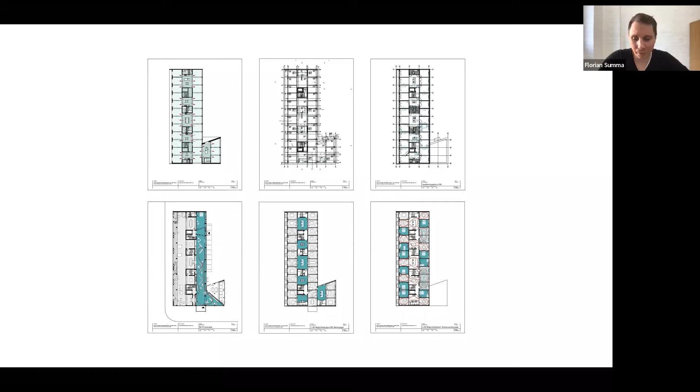Our question in the competition was: how universal, in a way, can the structure of a building be, while still allowing a lot of variety in different forms of living inside it?

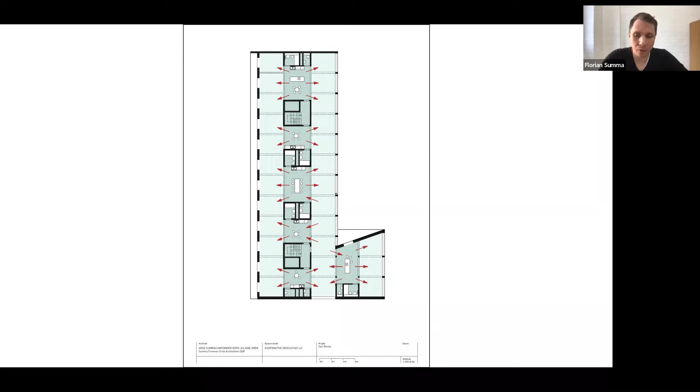This structure runs through the whole building, through all stories. Looking at this raw construction plan, you see it's a skeleton plan—only a few load-bearing walls, mostly connected to the staircases, with concrete columns on the outside, and then this grid of squares and fields which structure the building.

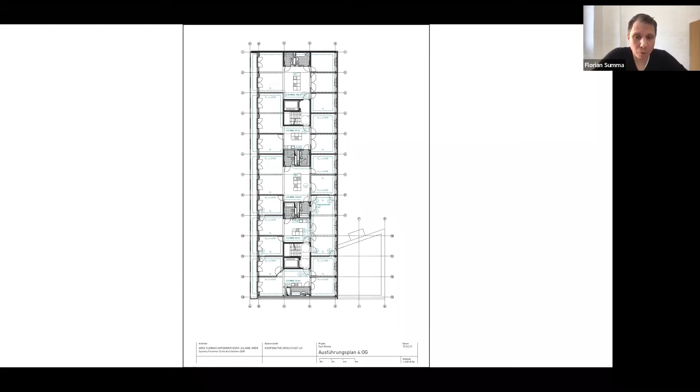The next step would be the fit-out plan for one of the stories, the fourth story here. What was added now is a wooden facade between the concrete columns, and quite a lot of lightweight partition walls which divide this field of rectangles into the different flats.

Of course, it's hard in this plan to see where the edges of a flat or apartment are, where it starts and where it ends. I'll try to illustrate it a bit later.

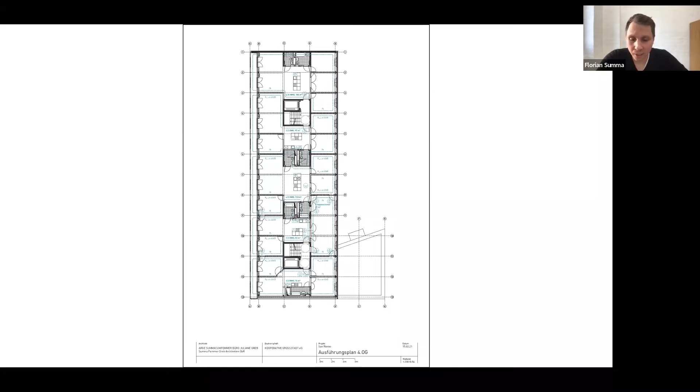As I said, we try to incorporate as many different forms of living into this structure, which was also in the brief. So for example, the cooperative asked for very big flats where a lot of people could live in, with a lot of individual rooms. Our concept was: isn't it possible to have just the kitchens in the middle as joint communal areas, and all the other rooms around it would be individual rooms for a shared flat system. We thought that's something which could be quite relevant in Munich, because it's quite expensive to live there.

Even though for the cooperative and our building there was a lot of focus on the costs, so in the end I think we achieved a very low budget building, but of course still it's quite expensive to live in Munich. And we said, okay, can't there be many individual rooms, because joint areas where you meet other people can be situated elsewhere in the building.

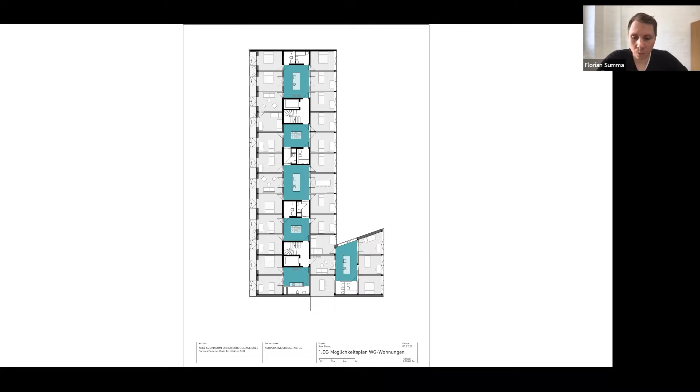And then we said there can also be, within the same system, ways of living where it's not so clear where your individual room or your individual area starts, but where things merge much more into each other, and one room which belongs today to one flat can belong to another flat the next day. I will come back to this later as well.

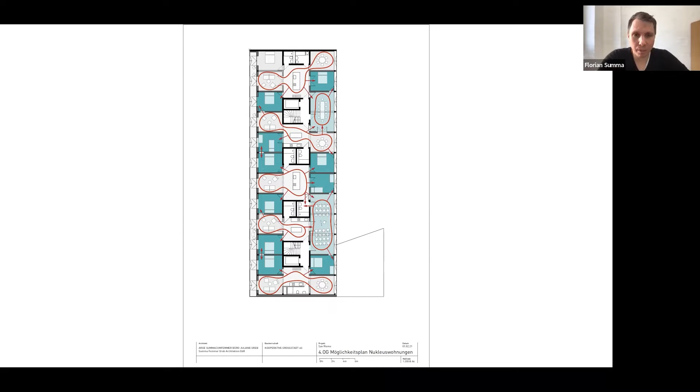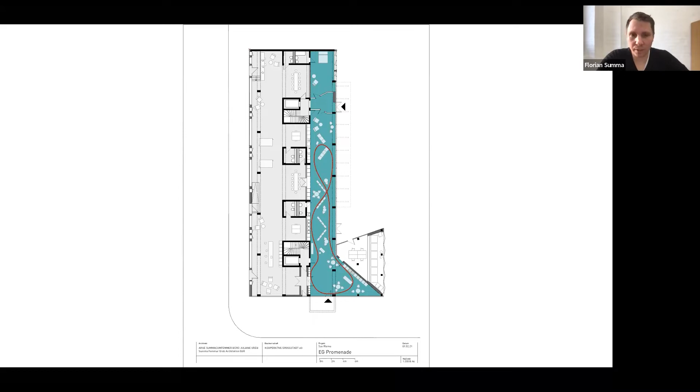So the next category would be 18 years, and we call it - could it be something like a period of childhood and adolescence in an apartment - which means maybe 18 years is something where you don't change the structure, or where you don't change any walls within the building, because 18 years isn't so long, and you can maybe deal with what is there.

But what you see is this structure, the concrete structure, which is something we think will never be changed, hopefully. And then the white walls, which of course can be changed, but maybe not every year, but maybe after 18 years or so, when the kids move out and you want to have a bigger room, and you can remove the walls because they are not load bearing, and the building doesn't collapse when you take them out.

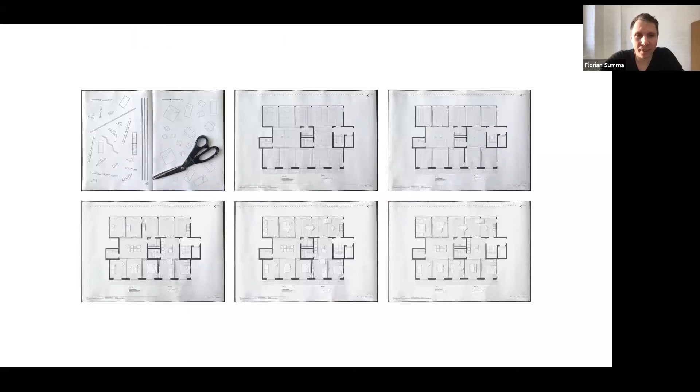We have this overall structure, which was pretty clear, and very precisely designed by us in terms of dimensions, proportions and sizes. Then there was a different phase within the construction process where we incorporated the future residents of the cooperative, and we sent them all a blank plan of their flats, with only the load-bearing walls and things they cannot change included.

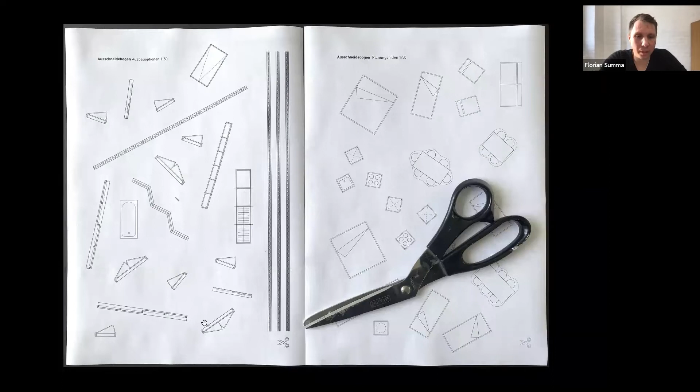Along with this, we sent them a cutout plan in the scale of 1 to 50 showing doors, lightweight non-load bearing walls, and furniture. And we asked the residents to actually design their own flat.

And the first thing, of course, here you see now 2 flats, which is indicated here. You see there's a minimum of individual rooms, like 3 rooms, and a maximum, and in this one here it's a minimum of 2 rooms. That's to do with the financial model, because they are subsidized, those rooms, and of course you cannot have too many, or there needs to be a certain number of people living on a certain square meter number.

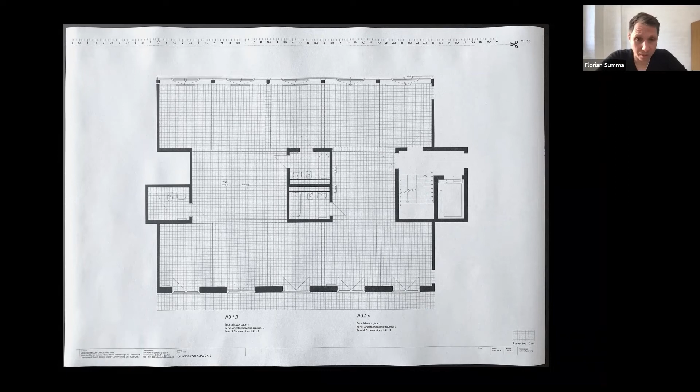So we gave them those plans, and what we got in return was, for example, this one, and here is now merged like 2 flats in one plan. They decided this flat here, for example, to have 2 rooms, like 2 of those 14 square meter rooms, divided by walls and added, and they added some doors. Then there's this kitchen here and a living area here which was left open, and then there's this extra room here which also has a door.

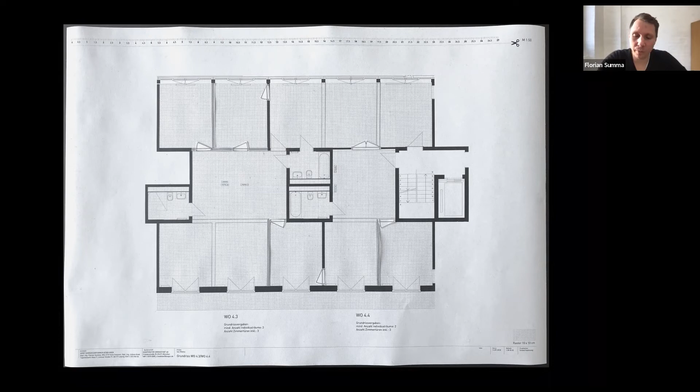And what is a bit special about this is that it also has a door from that side, which is actually the neighboring flat here. Also interesting, maybe, is this 3 squares here, which is the access to that flat. So if you enter here with the lift and the staircases, you don't enter directly into your flat, but you need to walk through that room here, which is a communal room, and which is also connected to that flat here and also this neighboring flat. And this family here decided that there should be also an additional door into this room from this communal room. Maybe in the next step you'll see why they did it.

So in those 2 rooms here, they have 2 kids. They placed 2 beds, and they had their master bedroom, or for the parents, they put a bedroom here, and the rest was the living room. The neighboring flat, it was just 1 person. She moved in here and put her bed into this room with a door, and had a kitchen here and a bit of a seating place. And that was the communal room.

I think in the beginning there weren't so many ideas of how to use that. But then, after a while, they realized those are actually architects, and they had to give up their very expensive office space in the center of Munich, and they moved their office into the flat and put it into this room. Now this door here makes sense because it's accessible to this communal room. So now clients and consultants, they walk through this communal room into their office here.

And the 2 kids had to sleep in 1 room in that period. Then there was another change, I think after 2 months or so, that actually the bedroom here from the parents moved also into the room for the children. So now there's this double bed, like 2 by 2 meters, and 2 small beds of the kids in here. So like 4 people actually sleeping in that room. And in return, this room no longer belongs to this flat.

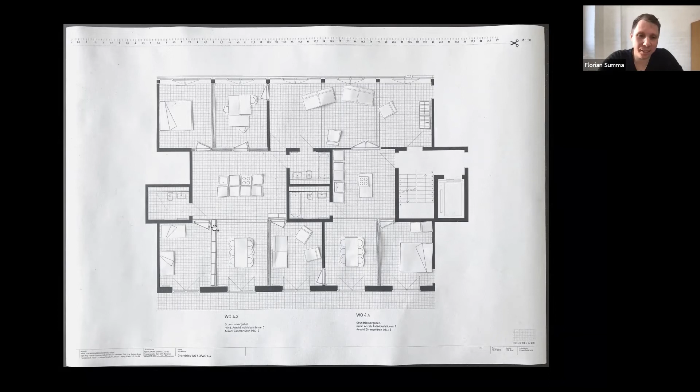They closed this door here, and this door was opened here. It's just a lock, of course, because this woman here got a boyfriend, and they need more space, so they took this room from this flat. Then, of course, they got a bit annoyed here after a while with the kids, and they divided this extra room here and put the kids here. I think this division is a bit more of a shelf right now, so it's not like a proper wall, but it works because it's the same size as every room.

So those would be changes which you could easily do within 3 years, as often as you want, because it's actually just closing a door and finding an agreement with your neighbor that you take the room from your neighbor, or you share it. And then, of course, some of them did some extra acoustic insulation. I think they put a mattress also in the door from the other side, because of course through a door you hear a bit from your neighbor, but you have a bit of flexibility in return.

Now turning to another project, and the time spans are getting shorter and shorter. 24 months was the time we spent on reconstructing the facade of our house in Leipzig. As you see in this image from 2014, it was really in a bad condition, and nobody wanted that house at the time.

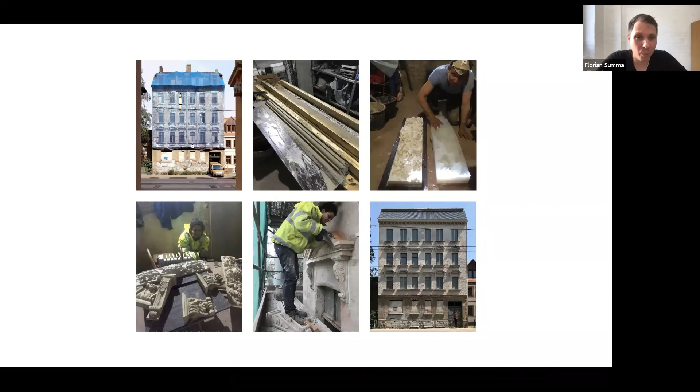The engineer and a lot of other people advised us to just tear it down and build something new. Of course that was not what we wanted to do, but we thought, a bit naively, can we not repair the house ourselves?

So we had a few things done by a professional, like fixing this roof on top. There was a cladding and scaffolding for 24 months, and we used this time to repair part of the facade ourselves.

With a lot of videos and YouTube research, we got into these themes. For example, we created profiles, or restored the existing stucco which was still okay, added the missing fragments and parts that weren't so good anymore, then made a mold of it with silicone and poured it with a special concrete.

So then we had all this stuff, and it was a bit of a weekend job, because at this time we were teaching and traveling by train, commuting every week from Zurich to Leipzig, 9 hours. We only had the weekends, but it was quite a lot of fun to produce this stuff.

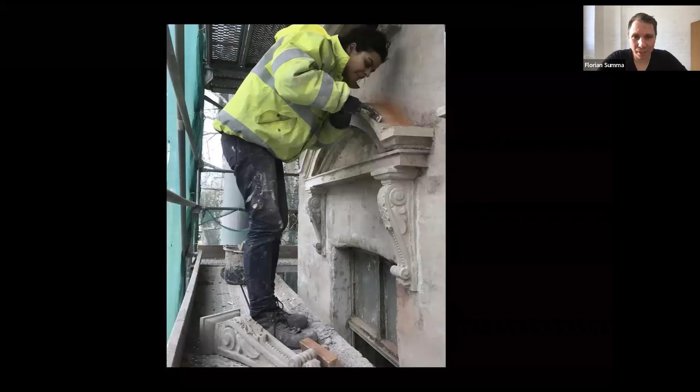And then, because we had the scaffolding, we could repair those parts, and it was interesting for us to really explore how the building was actually made.

It's quite interesting because we didn't know before that this part, for example, is sandstone. This one was plastered, and this one was precast plastered, while other parts were plastered on site, and in the end everything was painted so it actually looked the same. That was quite interesting, and that's the state it stayed in, I think, until 2 years ago.

At this time we still got letters from the city of Leipzig asking what we were going to do with the house, what the plans were, and if we ever wanted to move in, or if somebody wanted to move in.

Actually we were already living in the house for about 1.5 years, just behind those foils, which nobody sees, but we had an additional layer of thermally insulating windows behind them, which you'll see in the other images.

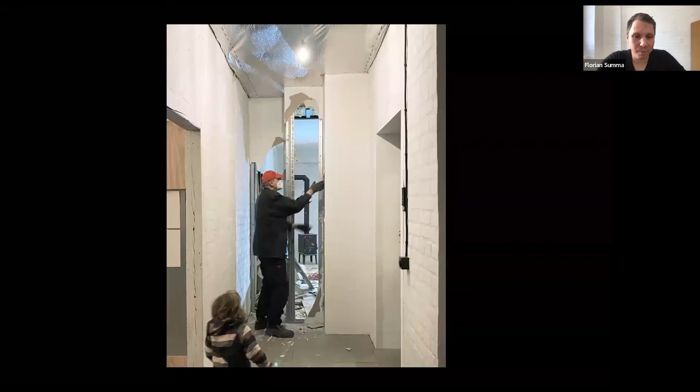This was a division we did because we only used 2 of the rooms, so we built this sort of wall, and after a few months we got rid of it again when we added the next room. During this time we had two kids, so we needed more space, renovated 2 additional rooms, and then could get rid of the wall again.

Even a shorter period, 4 months, maybe summer period until it gets cold. That relates to this entrance door, which we built ourselves. In the beginning we just needed some kind of door, and we wanted to have this opening, but we actually moved in without having it closed in any way. After a while we got our first kid and said, okay, we need to close it at least a bit, so we put this foil onto the door, and it was like this for quite a few months.

It was okay for us until we added this glass pane to the door, to make it a bit more proper. That's what I said in the beginning, I don't think it's representative in any way, or a kind of model for anyone else. It's just a very personal project of ours, related to our job as architects, and our joy to build things ourselves and experiment and try out things which you might not do for another client.

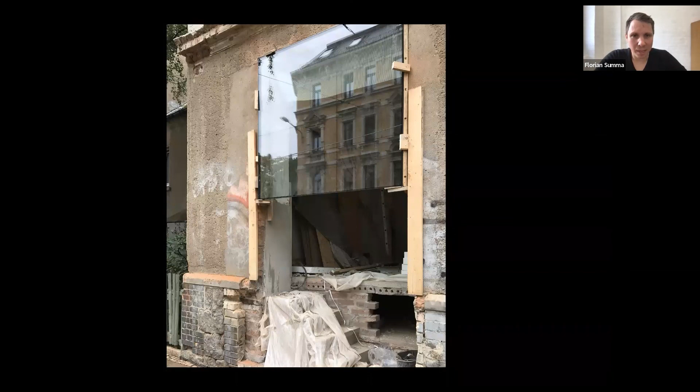Again, because we did everything ourselves, it took about 4 weeks, and then after a few more weeks we finally added this glass pane, which we again more or less not glued but screwed onto the existing brickwork, along with the door, which we organized quite quickly and included into it. The idea was how can we do things without needing a contractor to help us. So everything was available, the glass sheets you could just order, and it's just a matter of having enough people in the end to put it in there.

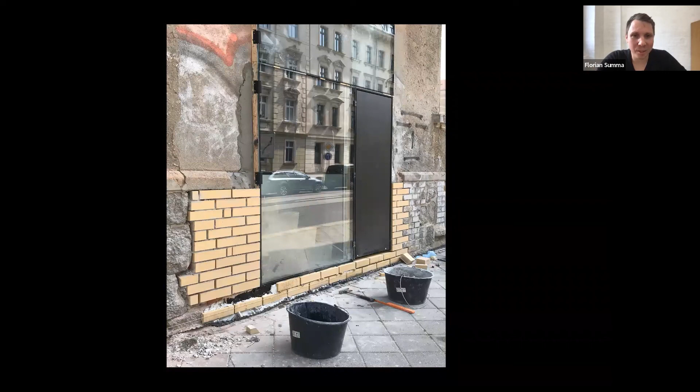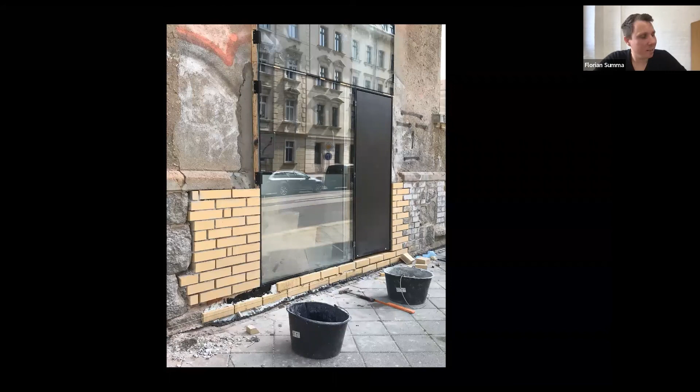Because everything is a bit of bricolage, and we are acting as bricoleurs, things don't work out. After 24 hours there were of course cracks inside our brackets here which hold the panes, but which are still there. I think the glass pane has now been in for about 2 years or so, and we can live with the cracks, it's okay for us. Maybe something you would never do in a project for other people.